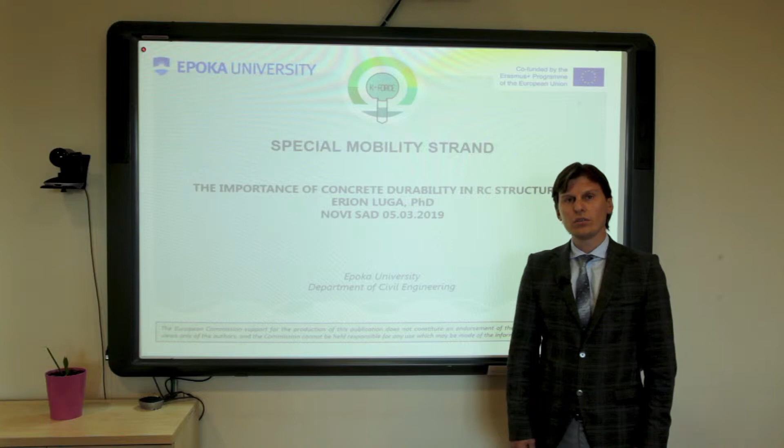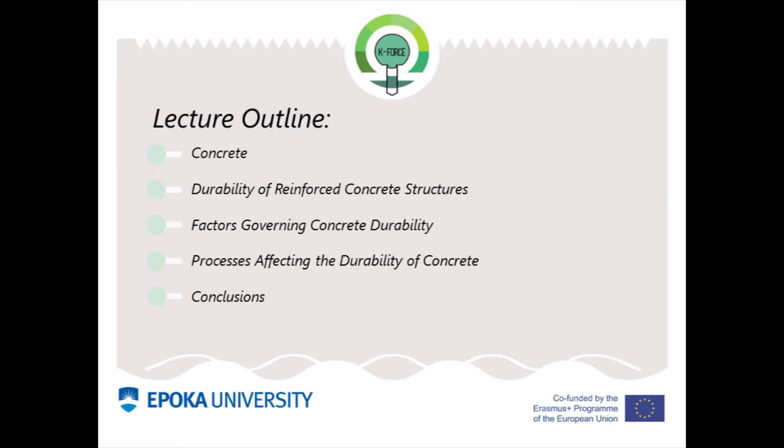The topic of my lecture is the importance of durability in reinforced concrete structures. During this lecture, we will talk about concrete, durability of reinforced concrete structures, factors governing concrete durability, processes affecting the durability of concrete, and conclusions.

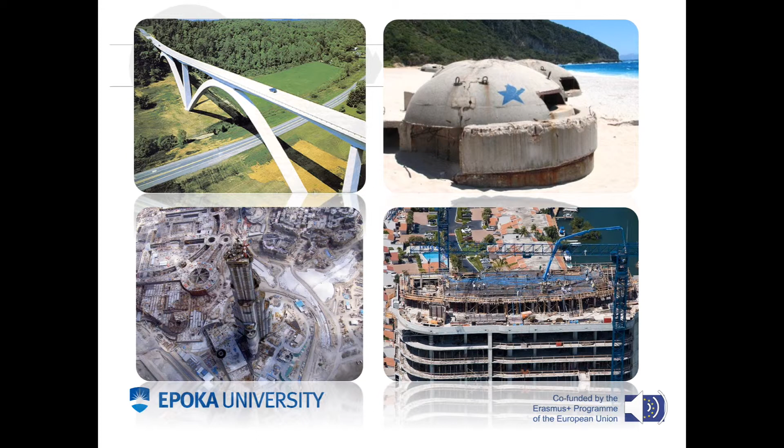Concrete is nowadays the most widely used material in the construction industry. Most of the structures surrounding our urban environment are made of reinforced concrete. In many countries, the ratio of concrete consumption to steel consumption exceeds 10 to 1, and the total world consumption of concrete in one year is estimated at 3 billion tons. Man consumes no material except water in such tremendous quantities.

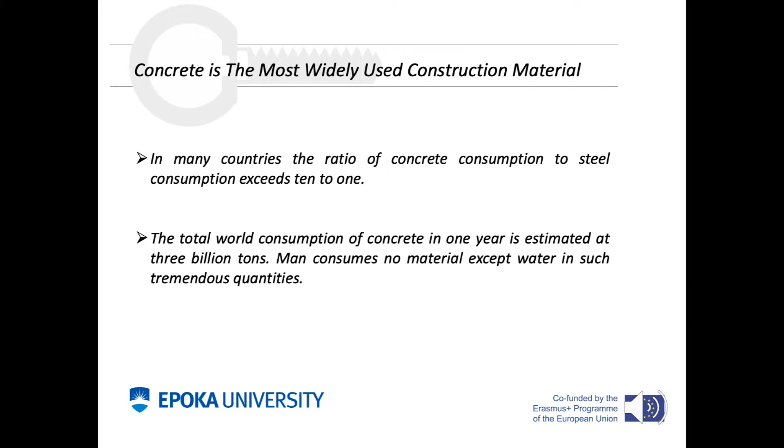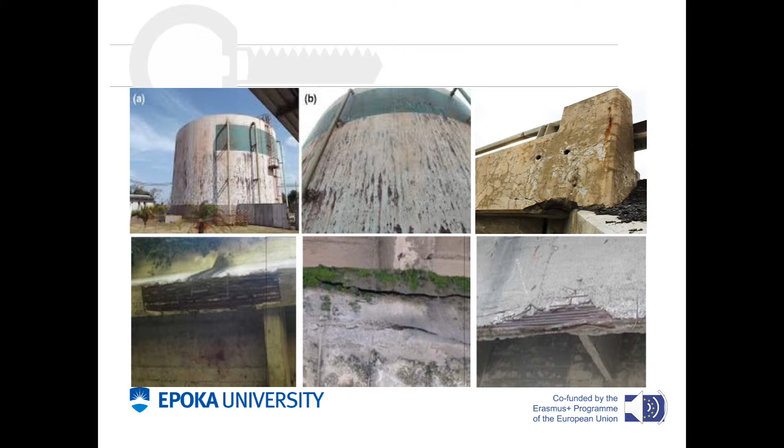As civil engineers, we are mostly concerned about the mechanical behavior of concrete and reinforced concrete. We must be conscious about the problems rising from the lack of concrete durability. The durability of concrete is very important because concrete should be capable to withstand the conditions for which it has been designed throughout the life of the structure. Loss of concrete durability can be caused by external agents arising from the environment or by internal agents within concrete.

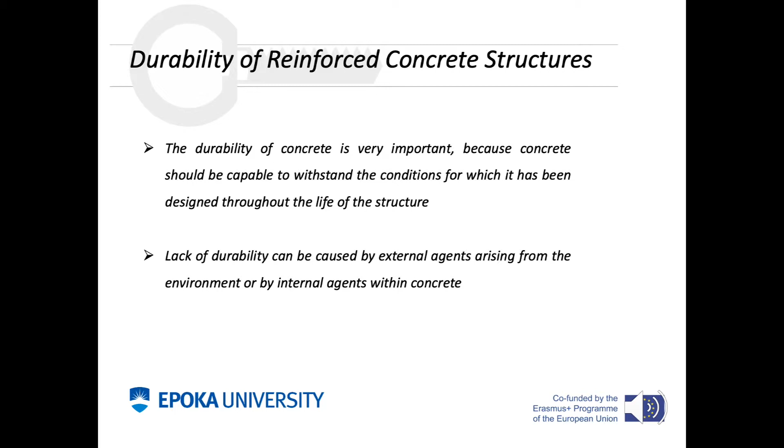Concrete suffers from different causes of deterioration. The effect of these causes may result in loss of strength in the form of different types of cracks, spalling, or surface wear, etc. On the other hand, permeability of concrete is the main factor affecting the durability of concrete. That is why the necessary measures should be taken into consideration to decrease to minimum levels the concrete permeability.

The main factor influencing the durability of concrete is its impermeability to the ingress of oxygen, water, carbon dioxide, chlorides, sulfates, etc.

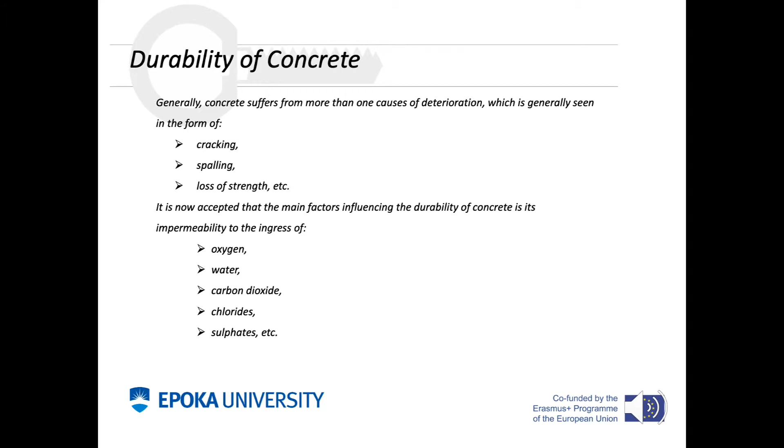When tensile stresses to which concrete may be subjected exceed the maximum tensile strength of concrete, it cracks. The increase of these tensile stresses may be caused by different factors, but the most common of them are related to internal volume changes.

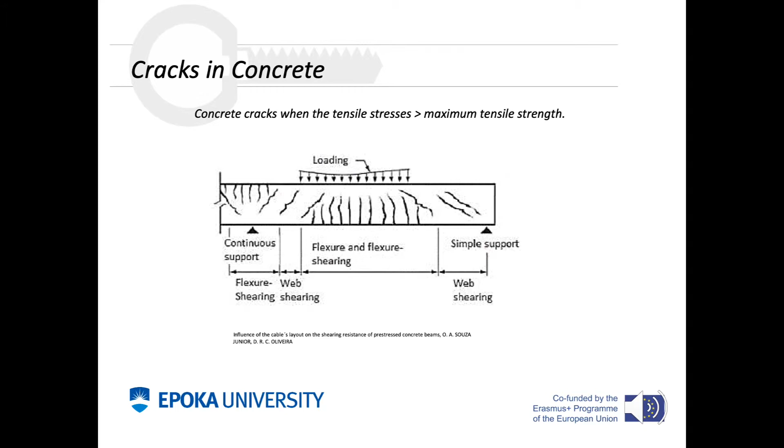Concrete changes slightly in volume for various reasons. The most common causes are fluctuations in moisture content and temperature. Restraint to volume changes, especially contraction, can cause cracking. Cracks can occur in hardened or unhardened concrete and may be caused by conditions such as plastic shrinkage, plastic settlement, structural cracking, rust, thermally induced cracking, etc.

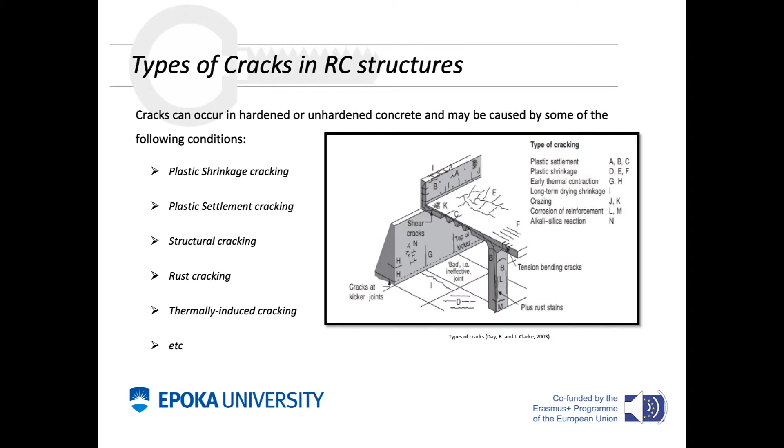Fast evaporation of water from the surface of freshly placed concrete makes the surface of concrete shrink. Due to the restraint provided by the concrete below the drying surface layer, tensile stresses develop in the weak region, stiffening plastic concrete, resulting in shallow cracks of varying depth. These cracks are often fairly wide at the surface.

Plastic shrinkage cracks can be prevented by taking measures to prevent rapid water loss from the concrete surface. Fog nozzles, plastic sheeting, wind breaks, and sunshades can all be used to prevent excessive evaporation.

Because almost all concrete is mixed with more water than is needed to hydrate the cement, much of the remaining water evaporates, causing the concrete to shrink. Restraint to shrinkage provided by the subgrade, reinforcement, or other parts of the structure causes tensile stresses to develop in the hardened concrete. Restraint to drying shrinkage is the most common cause of concrete cracking.

In many applications, drying shrinkage cracking is inevitable. Therefore, control joints are placed in concrete to predetermine the location of drying shrinkage cracks. Drying shrinkage can be limited by keeping the water content of concrete as low as possible and maximizing the coarse aggregate content.

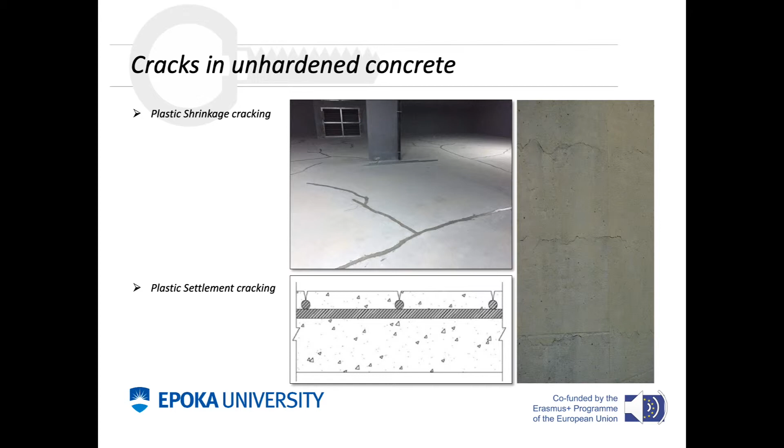Properly designed and constructed concrete members are usually strong enough to support the loads for which they are intended. But overloading can occur for a variety of reasons: a change in use of a structure without proper structural upgrades, unintentional overloading, and other unusual circumstances. Earthquake damage is a classical example of the overloading of concrete structures.

Overload damage can occur during construction when concrete has not yet reached design strength. Early removal of formwork, or storage of heavy materials, or operation of equipment on and around the structure can result in the overloading of certain concrete members. A common error occurs when precast members are not properly supported during transport and erection.

Errors in post-tension construction, such as improperly timed or sequenced strand release, can also cause overload cracking. Damage caused by impact is another form of overload. A common form of impact overload occurs at slab edges of joints on vehicular traffic surfaces.

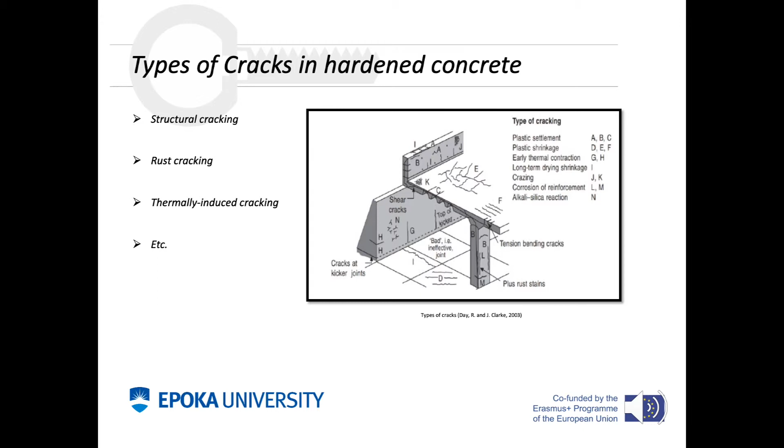Even in properly designed reinforced concrete, load-induced tensile stresses can occur. This point is readily acknowledged and accepted in concrete design. Current design procedures use reinforcing steel to not only carry tensile loads, but to obtain both an adequate distribution of cracks and a reasonable limit on crack width.

Permeability of concrete can be defined as the property that governs the rate of flow of a fluid into a porous solid. It is also related to the amount of water migration through concrete when the water is under pressure, and the ability of concrete to resist penetration of any substance, be it a liquid, gas, or chloride ion.

Designers of dams and other large hydraulic structures needed to know the rate at which water passes through concrete that was subjected to a relatively high hydraulic pressure. Water is generally involved in every form of deterioration, and with porous solids, the ease of penetration of water into the solid usually determines its rate of deterioration.

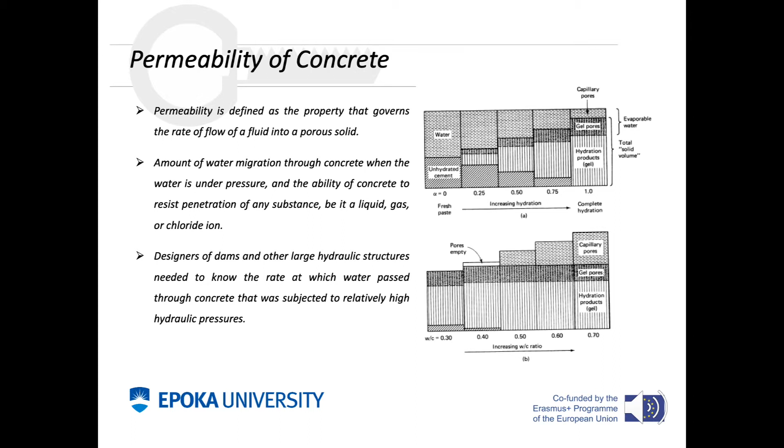Loss of concrete durability can be analyzed in two different aspects: the first are the factors governing concrete durability, and the second are the processes affecting the durability of concrete.

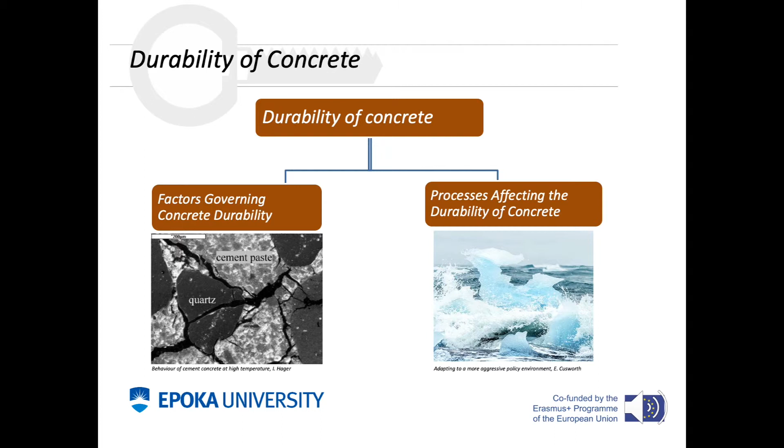Some of the factors that govern the durability of concrete can be listed as concrete mix design, structural design, reinforcement detailing, concrete cover, curing of concrete, supervision, quality of materials, etc.

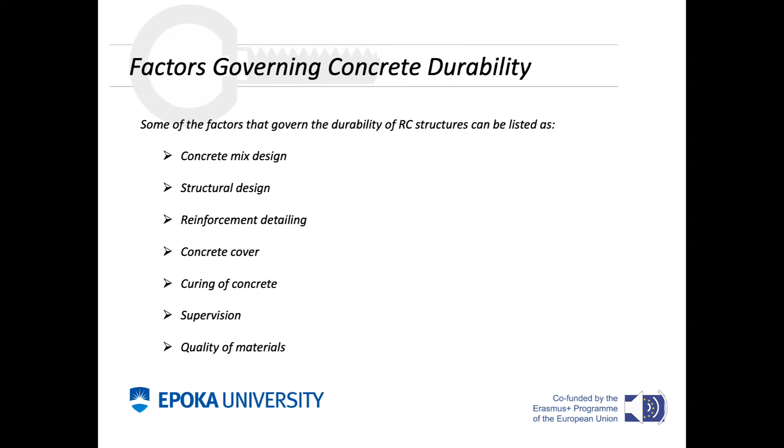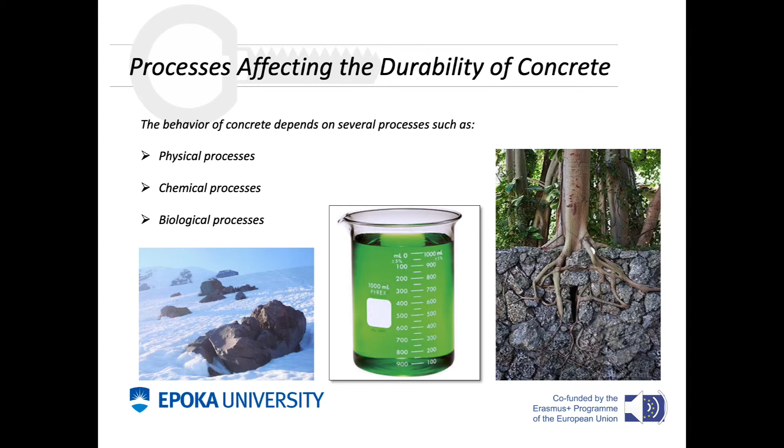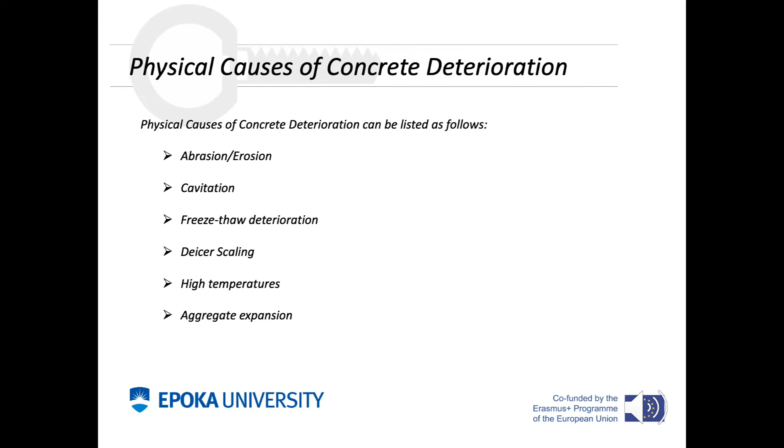The behavior of concrete depends on several processes such as physical processes, chemical processes, biological processes, and others. Physical causes of deterioration can be listed as follows: abrasion, erosion, cavitation, freeze-thaw deterioration, deicer scaling, high temperatures, aggregate expansion, etc.

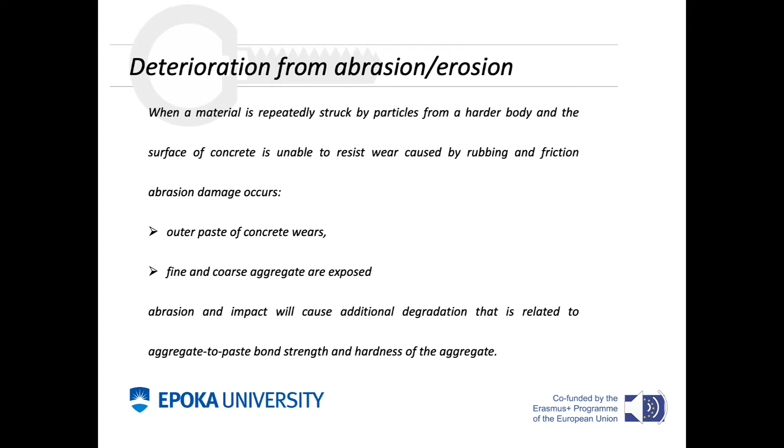When a material is repeatedly struck by particles from a harder body and the surface of concrete is unable to resist wear caused by rubbing and friction, abrasion damage occurs. The outer paste of concrete wears, fine and coarse aggregate are exposed. Abrasion and impact will cause additional degradation that is related to aggregate-to-paste bond strength and hardness of aggregate.

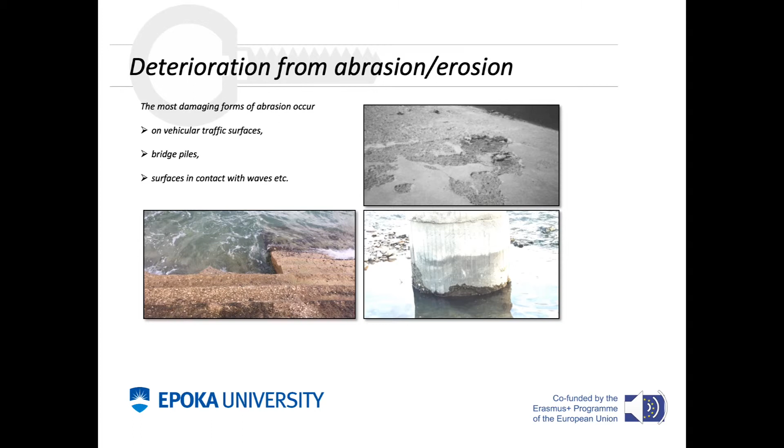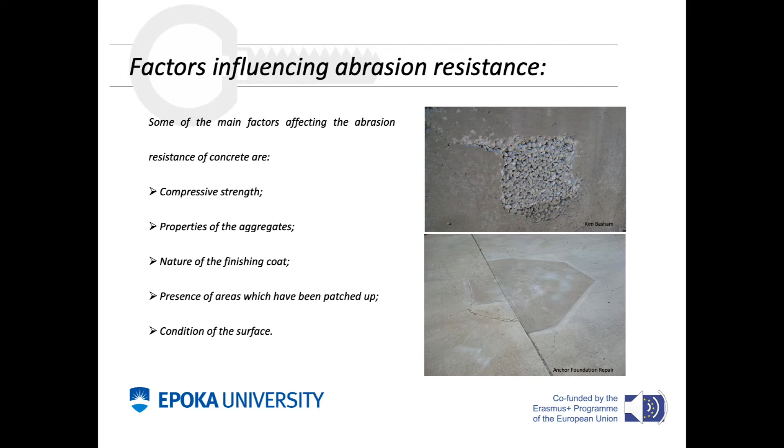The most damaging forms of abrasion occur on vehicular traffic surfaces, bridge piles, surfaces in contact with waves, etc. Some of the factors affecting the abrasion resistance of concrete are compressive strength, properties of the aggregate, nature of the finishing coat, presence of areas which have been patched up, conditions of the surface, etc.

Cavitation is called the formation of bubbles or cavities in a liquid. The cavities form where the local pressure drops to a value that will cause the water to vaporize at the prevailing fluid temperature.

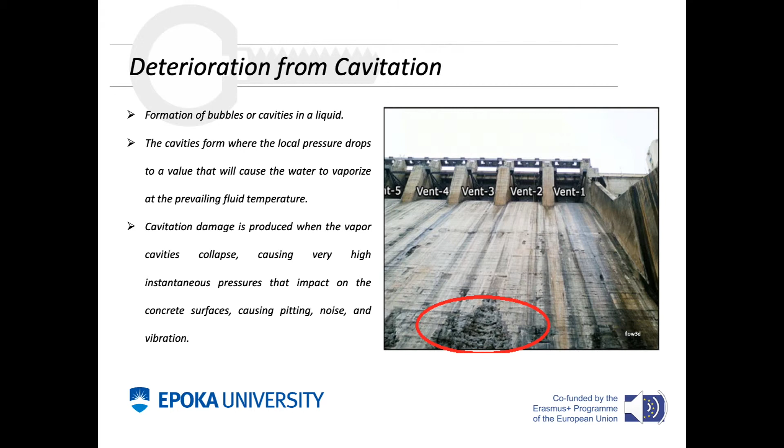Cavitation damage is produced when the vapor cavities collapse, causing very high instantaneous pressures that impact on the concrete surfaces, causing pitting, noise, and vibration.

At temperatures below zero, cement does not hydrate. On the other hand, as it freezes, water expands about 9% and produces pressure in the capillaries and pores of concrete. Exceeding the tensile strength of the concrete, the cavity will dilate and rupture. Successive freeze-thaw cycles and disruption of paste and aggregate can cause significant expansion and cracking, scaling, and deterioration.

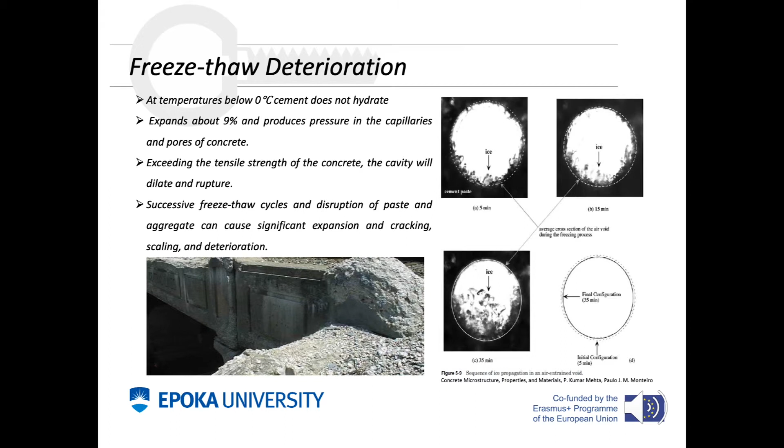In order to prevent freeze-thaw deterioration of concrete, air entraining agent is used. Entrained air voids act as empty chambers in the paste for the freezing and migrating water to enter, thus relieving the pressure in the capillaries and pores and preventing damage to the concrete. Low permeability concrete also performs better when exposed to freeze-thaw cycles.

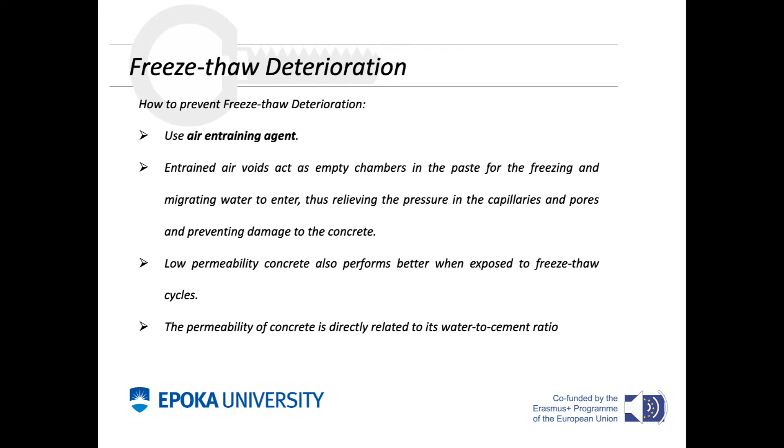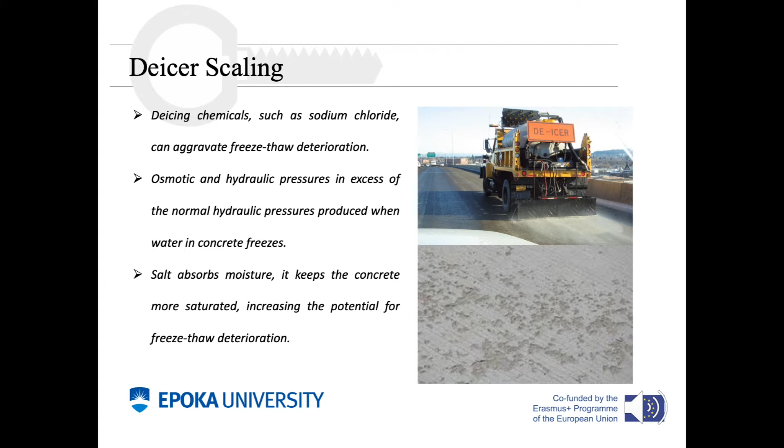De-icing chemicals such as sodium chloride can aggravate freeze-thaw deterioration. Osmotic and hydraulic pressures in excess of the normal hydraulic pressures are produced when water in concrete freezes. Salt absorbs moisture, it keeps the concrete more saturated, increasing the potential of freeze-thaw deterioration.

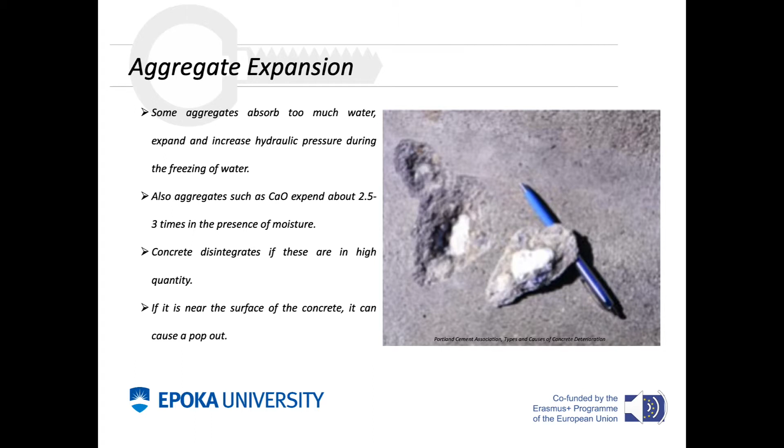On the other hand, some aggregates absorb too much water, expand and increase hydraulic pressure during the freezing of water. Also, aggregates such as calcium oxide expand about 2.5 to 3 times in the presence of moisture. Concrete disintegrates if these are in high quantity. If it is near the surface of the concrete, it can cause a pop-out.

Another factor affecting concrete durability is high temperatures. The behavior of concrete at high temperatures is influenced by several factors such as rate of temperature rise and the aggregate type and stability, moisture level, etc.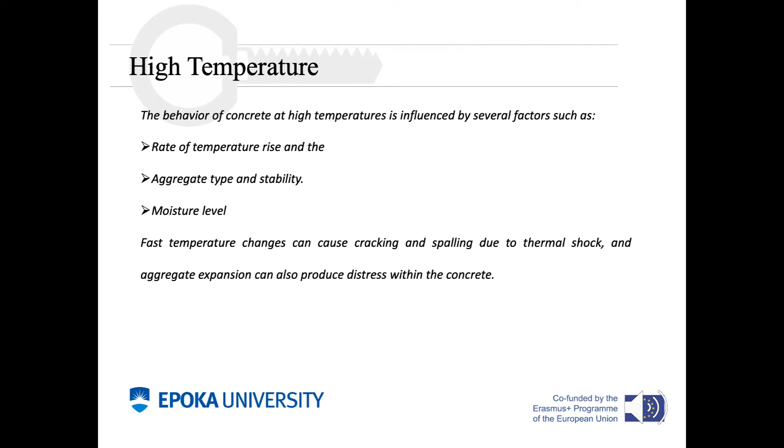Fast temperature changes can cause cracking and spalling due to thermal shock, and aggregate expansion can also produce distresses within the concrete. High temperatures also affect the compressive strength and stiffness of concrete.

Above 100 degrees, the cement paste begins to dehydrate, losing chemically combined water of hydration, which gradually weakens the paste and paste-aggregate bond. The effect of high temperatures on concrete is destructive.

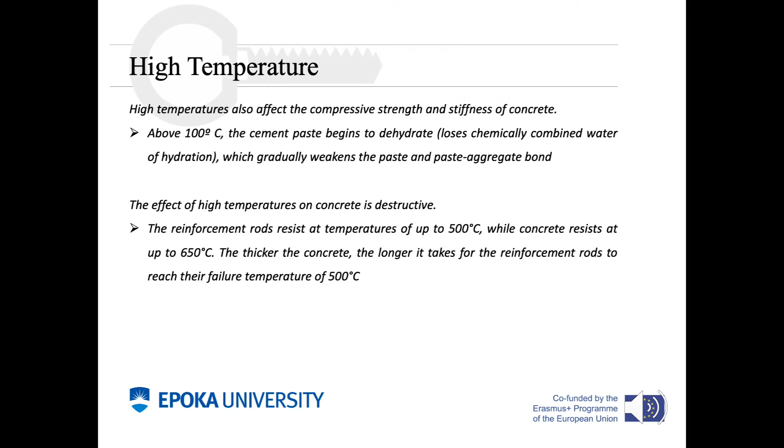Reinforcement rods resist at temperatures of up to 500 degrees, while concrete may resist up to 650 degrees. The thicker the concrete, the longer it takes for the reinforcement rods to reach their failure temperature of 500 degrees.

Chemical causes of concrete deterioration can be listed as acid attack, sulphate attack, alkali-silica reaction, carbonation, corrosion, leaching, etc.

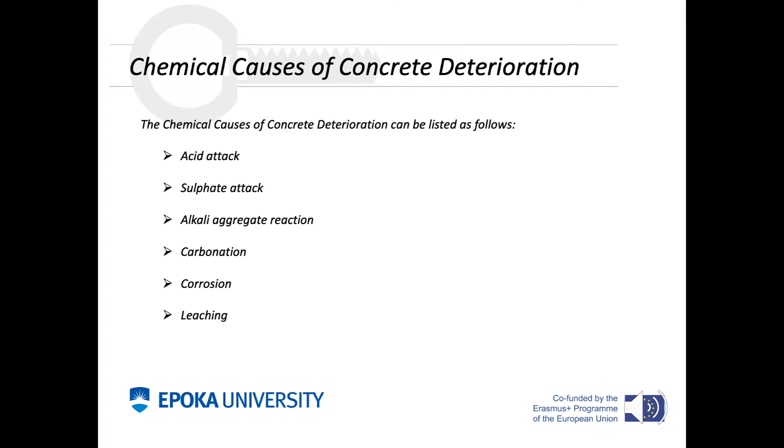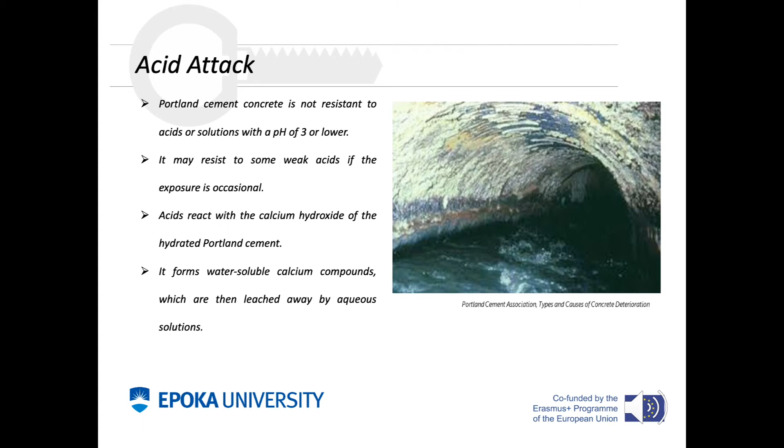Portland cement concrete is not resistant to acids or solutions with a pH of 3 or lower. It may resist some weak acids if the exposure is occasional. Acids react with the calcium hydroxide of the hydrated Portland cement, forming water-soluble calcium compounds, which are then leached out by aqueous solutions.

Sulfates of sodium, potassium, calcium, or magnesium are sometimes found in soil or dissolved in groundwater. These salts react with aluminate compounds, calcium, and hydroxyl of hardened Portland cement, forming ettringite and gypsum. In the presence of sufficient water, these reactions of delayed ettringite formation cause expansion of concrete, leading to irregular cracking. The cracking of concrete provides further access to penetrating substances and to progressive deterioration.

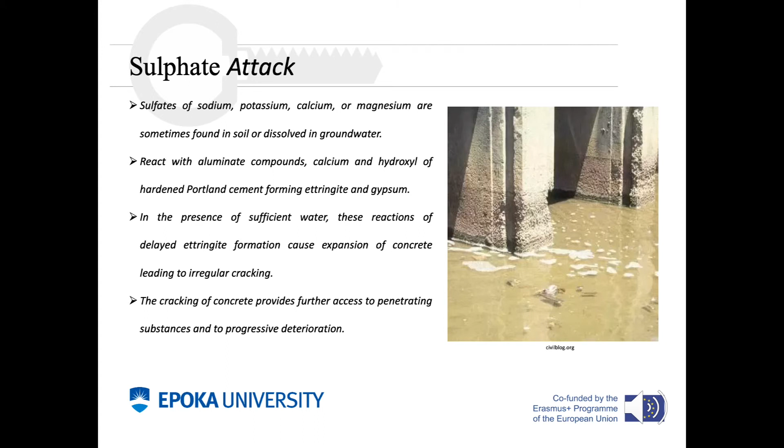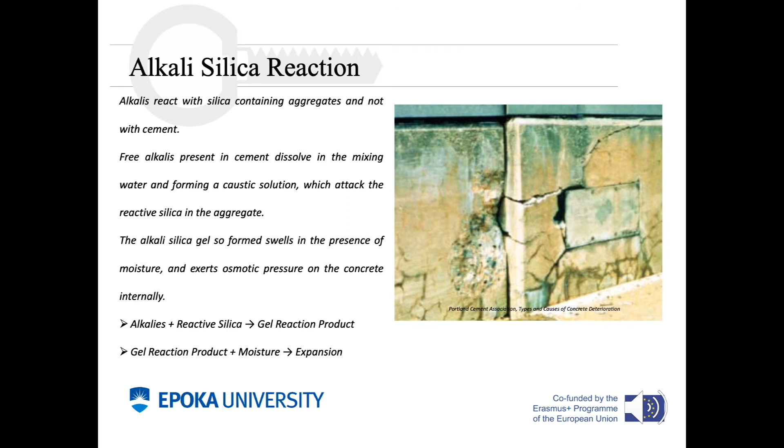Alkali-silica reaction: alkalis such as sodium oxide and potassium oxide coming from Portland cement react with reactive silica-containing aggregates. Free alkalis present in cement dissolve in the mixing water and form caustic solutions which attack the reactive silica in the aggregate. As a product of this reaction, an alkali-silica gel is formed. This gel swells in the presence of moisture and exerts pressure on the concrete, which may lead to formation of cracks and deterioration of concrete.

Concrete itself is a highly basic environment because of the strong base such as calcium hydroxide in its internal structure. The pH of the fresh cement paste is at least 12.5. When calcium hydroxide in concrete reacts with carbon dioxide coming from air or from water, it produces calcium carbonate and water, thus decreasing the calcium hydroxide in concrete, resulting in a decrease of the pH. The pH of a fully carbonated paste is about 7.

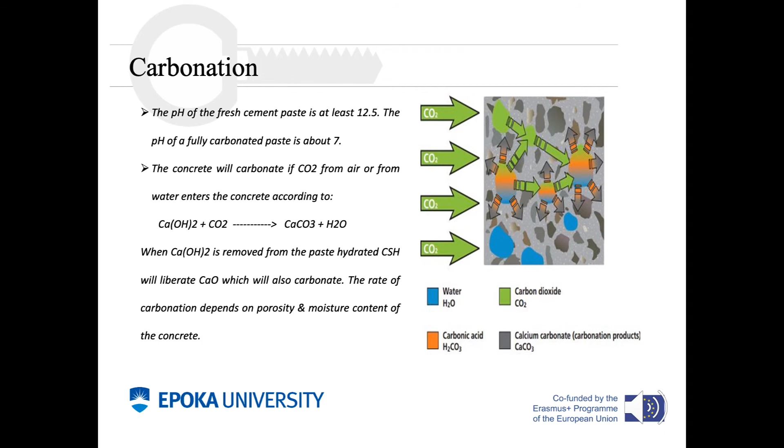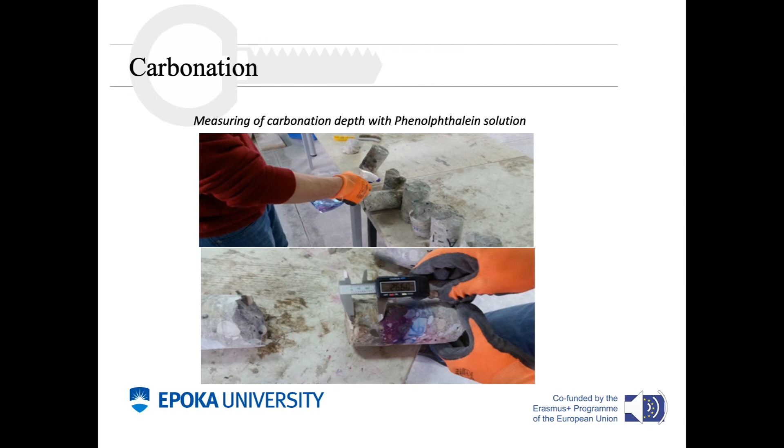When calcium hydroxide is removed from the paste, hydrated CSH gel will liberate calcium oxide, which will also carbonate. The rate of carbonation depends on porosity and moisture content of the concrete. The figure shows the measuring of carbonation depth with phenolphthalein solution.

Corrosion of reinforcing steel is one of the main causes of deterioration in reinforced concrete structures. Steel is thermodynamically unstable under normal atmospheric conditions because its natural state is in the form of iron oxides. As a result, it tends to release energy and revert back to its natural state. As steel corrodes, it produces rust, which occupies a greater volume than steel.

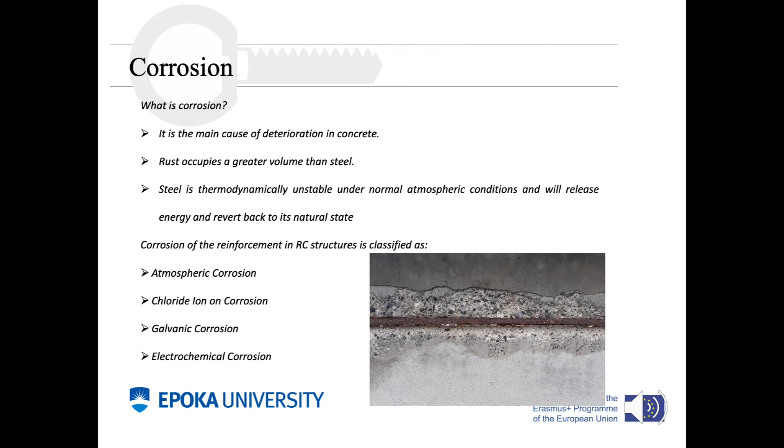Corrosion of the reinforcement in RC structures is classified as atmospheric corrosion, chloride ion corrosion, galvanic corrosion, and electrochemical corrosion.

The internal structure of concrete is rich with calcium hydroxide, which does not have any notable effect on the strength of concrete, but it fills some of the concrete pores and keeps concrete pH above 12.5. When concrete is saturated with water, the calcium hydroxide and other soluble salts are dissolved and transported out of concrete, thus increasing the porosity and decreasing the pH of concrete. This process is called leaching.

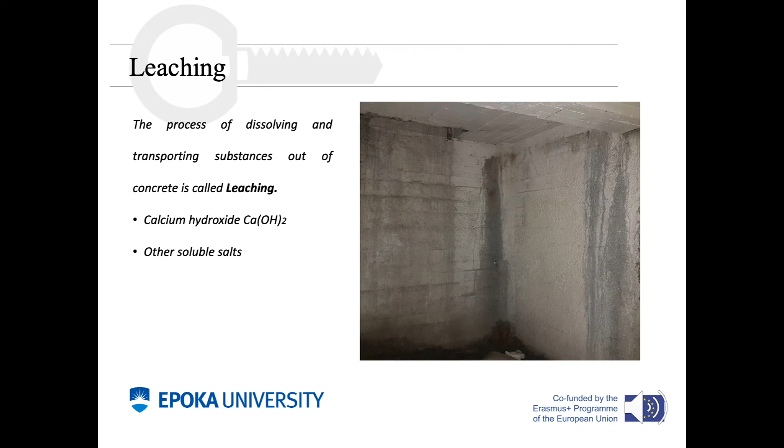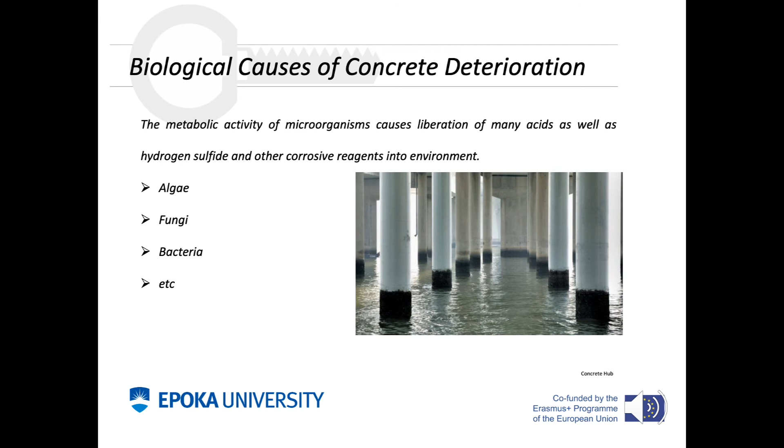Biological causes of concrete deterioration: the metabolic activity of microorganisms causes liberation of many acids as well as hydrogen sulfide and other corrosive reagents into the environment. Algae, fungi, bacteria, etc. are some of the biological threats causing concrete deterioration.

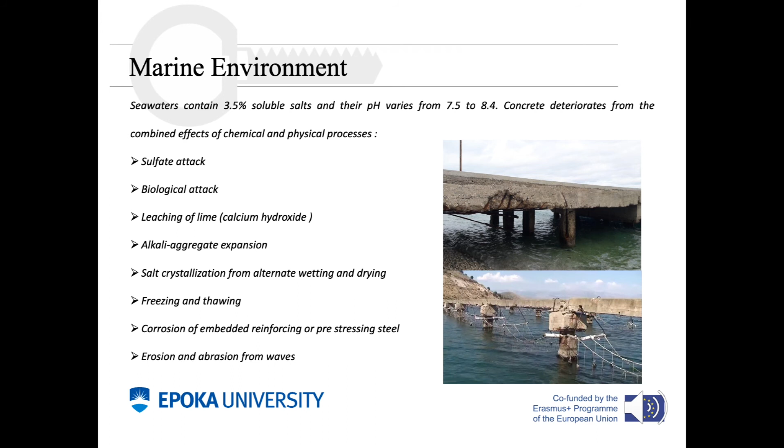Marine environment: seawater is a mix of different aggressive environments because seawaters contain about 3.5% soluble salts and their pH varies from 7.5 to 8.4. On the other hand, concrete in marine environment is affected by the combined effect of chemical, physical, and biological processes such as sulphate attack, leaching of lime, alkali aggregate expansion, salt crystallization, alternate wetting and drying, freezing and thawing, corrosion of embedded reinforcing steel or prestressing steel, erosion and abrasion from waves, etc.

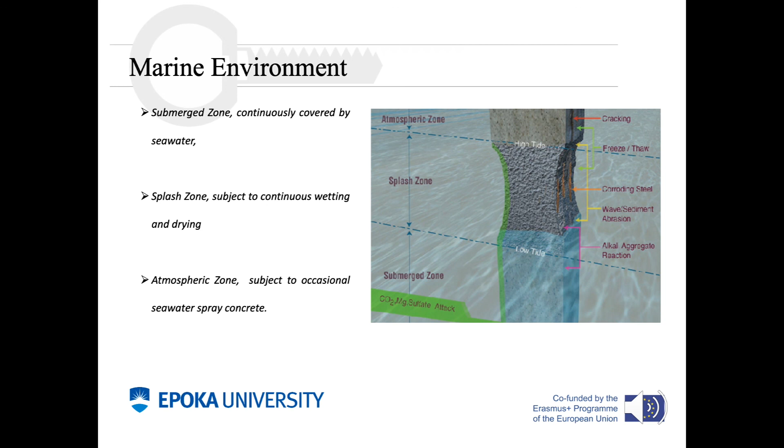The parts of reinforced concrete structures built in the marine environment can be classified into 3 zones regarding the conditions of environment affecting its durability. The first is the submerged zone, the lower part continuously covered by seawater. The second is the middle part called the splash zone, subjected to continuous wetting and drying, whereas the third is the upper part called the atmospheric zone, subjected to occasional seawater. The most endangered part is the splash zone.

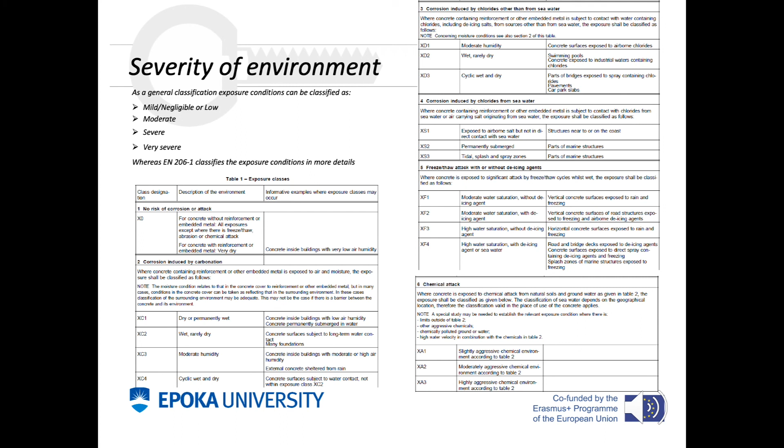As a general classification, exposure conditions can be classified as mild, negligible, or low, moderate, severe, very severe, etc. Whereas EN norms classify the exposure conditions in more detail, depending also on the type of environment.

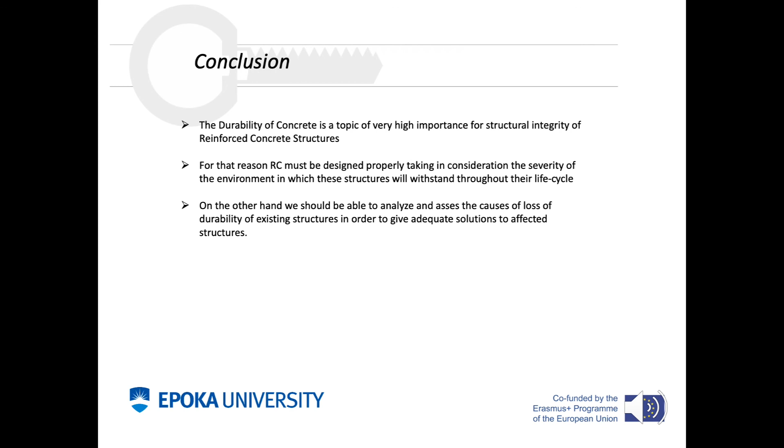As a conclusion, we should be aware that the durability of concrete is a topic of very high importance for the structural integrity of reinforced concrete structures. For that reason, reinforced concrete must be designed properly, taking into consideration the severity of the environment in which these structures will withstand throughout their life cycle. On the other hand, we should be able to analyze and assess the causes of loss of durability of existing structures in order to give adequate solutions to affected structures.